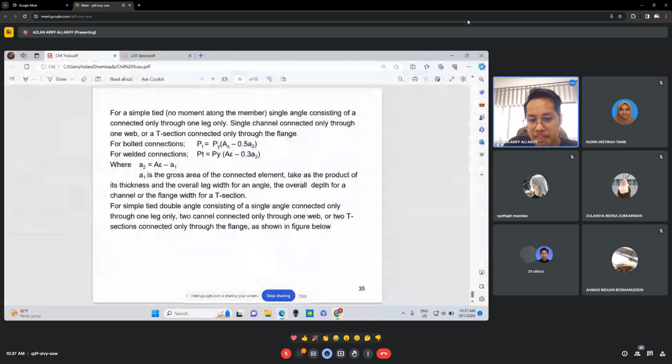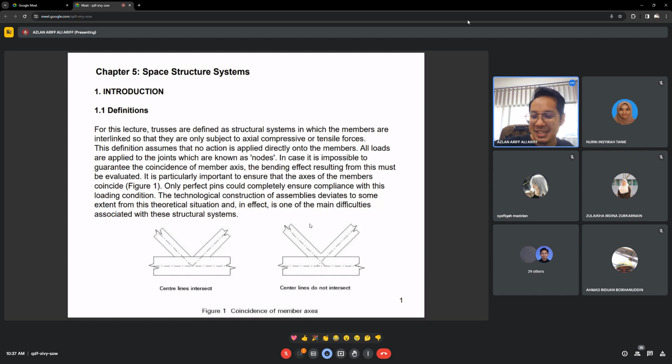Alright, okay, thank you. So continuing from earlier, we were discussing lattice, or truss, or lattice girder. Now we are going to space structure system. As I said earlier, space structure system is a continuation from truss. Truss is 2D, but space structure...

When we arrange many trusses, align them and interconnect them, it becomes a space structure, or in architecture we usually refer to them as space frame. Space frame is usually used for long span buildings. In your project, perhaps you guys have used this a bit during your Design 05 project if there's a long span area, especially multi-purpose halls or auditoriums.

But I usually see space frame used in your Design 08. InsyaAllah next semester you'll be in Design 08. So in some ways you will get familiarized with space structure, space frame structure if you opt to use this kind of aesthetic or long span spaces. But it depends, some Design 08 projects use timber, some use concrete. So it's up to your design or your intention in your design.

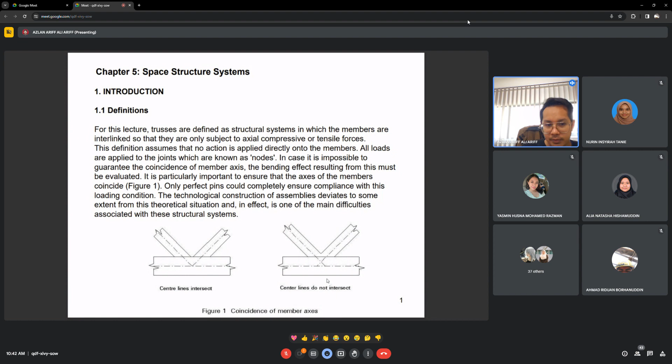So the technological construction of the assemblies deviates to some extent from this theoretical situation, and in fact is one of the main difficulties associated with this structural system. Only perfect pins can ensure compliance with the loading condition. We don't really know the loading condition in that case.

This lecture is concerned mainly with the truss system for roofs, which span in two directions - the term space structure. It's a bit hard for me to show since this is online, but perhaps some of the diagrams earlier can relate. Otherwise I can draw it. I need you to imagine it in some ways.

Alright, which span in two directions. For example, one direction is this one - this is what we see from 2D. But when we look from the left or right, they have another one. It will join at this point, but there will be another one like this. So when we have a development from truss which is planar 2D, and then another one aligns together, it creates a three-dimensional form. And within this three-dimensional space, it's where we call it space structure.

Other arrangements are possible, such as a continuous system based on the Vierendeel girder. Vierendeel is one of the founders who came up with this structure. Based on the Vierendeel girder, diagonal bracing members are unnecessary because bending behavior is predominant rather than axial behavior. The resultant voids can be used to accommodate mechanical and electrical services.

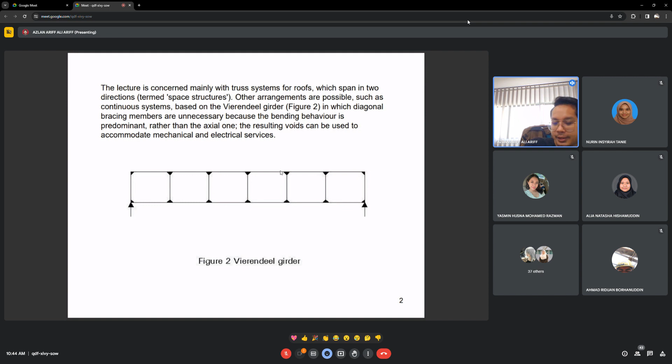Historical background: until the 1960s, almost all truss systems were two-dimensional. This one is very basic. They developed from timber roofs, which themselves had evolved from basic triangular arrangements to more complex shapes, as shown in Figure 3.

3A has led to the introduction of the suspended member, which is used to distribute the load. Again, when we talk about structure, we are talking about how we can distribute the structure effectively.

This one, when there's a connection between the ridge of the roof up here and the suspended member that ties back to the beam, it carries some of the loads that would otherwise be carried by the tie beam. It suspends back upward towards the ridge, and then it redistributes to the sides of the roof. That's how they achieve equilibrium of forces, or distribution of loads. That's B. Another one is a tie.

They have more members, so the loads can be more evenly distributed. On the last one, D, did that eliminate the tie beam? Another use of the tie beam is to carry the load while retaining the shape of the roof. But in this one, when they have some ties making up the suspender and the tie, the overall bottom chords of the beam can be eliminated.

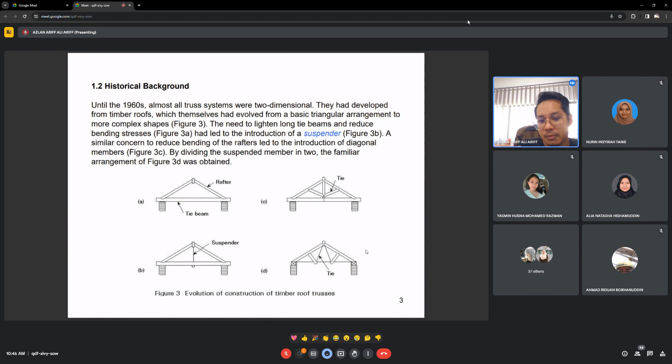The use of metal became dominant in the 19th century for all types of structures except domestic buildings. Metal was considered a high-tech or advanced building material in the 19th century. That's why the use of the material, the use of metal, was more limited to large span structures or bigger structures rather than domestic buildings like houses, residences, or offices, which rarely used metal.

This was for the infrastructure or mega structures that a country or government develops. Articulated systems commonly used for roofs of railway stations are perfect examples of the two-dimensional triangulated system. There are a lot of examples, and railway stations really exhibit some of the two-dimensional triangulated systems used for the space frame.

The second half of the 19th century was characterized by some remarkable achievements, for example the Garabit Viaduct in France, pictured in Figure 5, and the Maria Pia Bridge in Oporto. This one has no picture. Designed by Eiffel.

Eiffel, like with the Eiffel Tower he developed, used metal. The advancement of technology allowed for the use of metal, and the development of the space truss, because the entire construction of the Eiffel Tower, we can see, is also made from space frame or space truss.

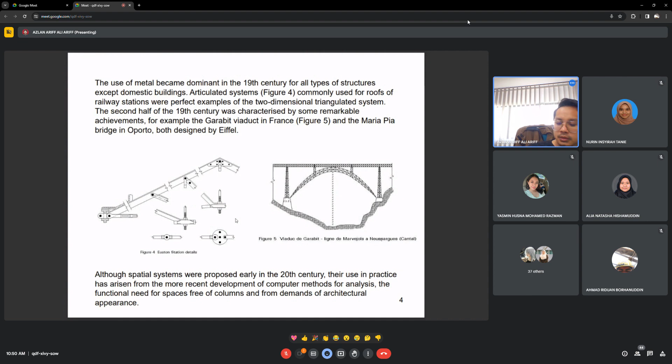Different types of system. Introduction: different types of the spatial truss system are normally classified according to their general shape. There are three shapes that are typically used in spatial truss systems, which are two-dimensional grids, cylindrical vaults, and domes. Later we will go through one by one.

In each case, it is advisable to distinguish between the single and double or even triple layer grids. The number of layers depends on the span. A third characteristic lies in the geometry chosen for the system of the members in the layers, and possibly in the composition of the bracing of the layers. For this space truss system, there is the single layer, the double layer, and it can go even triple layer grids. This is a form of grids.

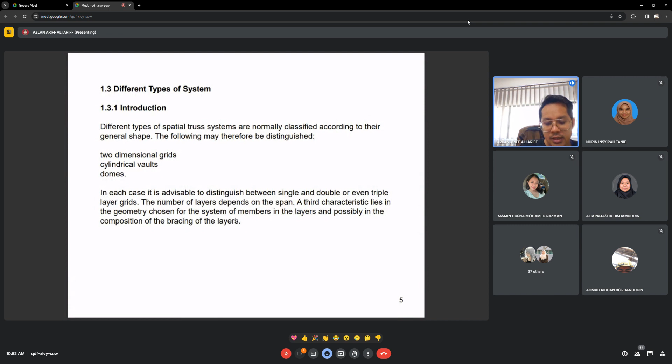Different shapes have different characteristics in terms of strength in the structure. Single layer grids: these grids are mentioned only as a reminder that this system is beam grillage, like a grill or net, which works in bending and torsion rather than axial loading from above. Bending and torsion come from the sides, from left and right.

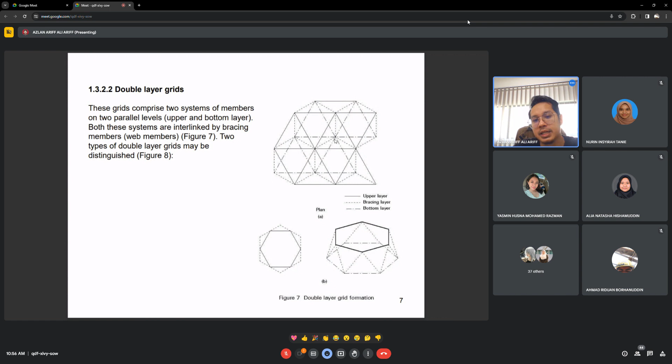Okay, you boleh nampak the classification. This is upper layer, the bracing layer yang the dotted one, and the bottom layer dekat bawah sekali. This is on the plan punya view. On 3-dimensional ataupun axonometric punya view, this one - you boleh nampak the top one, and then the bracing, and then it is joined to the bottom layer. This interconnected ataupun interlink is the bracing.

Lattice grids is where always the top and bottom chords are in the same vertical plane. Spatial grids made up of triangular base, pyramids, square or hexagonal. There are a few patterns, and different shapes carry different characteristics on the structural strength.

Okay, 2 kinds may be identified - one is where the layer geometrics are identical though displaced, offset grids, and the other layer geometric are different, okay, differential grids. These systems are suitable for spans up to 100 meters. For greater spans, it's necessary to incorporate triple layer, a triple layer grids, to avoid long members otherwise necessary with the increased depth.

Alright, so apa yang dia cakap member panjang-panjang ni is, each of the modules consists of the identical members ataupun the same modules, that are arranged together and connected together by the nodes. Okay, and ni rasanya I dah cakap sikit tadi, which is...

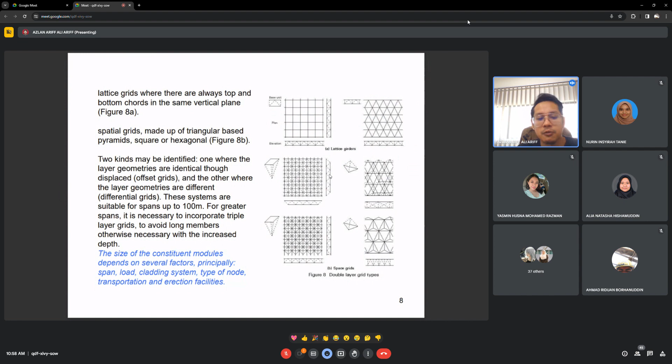The size of the constituent modules depends on several factors, principally the span, the load, cladding system, type of node, transportation, and erection facilities. For span between 30 to 40, length members about 1.5 to 3 are acceptable. So member length tadi macam satu lah, macam satu ni - 3 meter ataupun 1.5, between 1.5 to 3 meters dah cukup, considered acceptable.

Alright, the advantage of the double layer grids are numerous. There are three-dimensional structures which can withstand loads from any direction, because it is in three dimension, so it can resist the torsion, the bending, the axial loads, many kinds and many directions. They are hyperstatic, which is very stable, and buckling of some compression members does not cause the whole to collapse, as been demonstrated by mathematical models and experiment.

The stability ataupun the strength of the space frame structure double layer tadi is proven by the mathematical calculation and models, experiment. Their rigidity minimizes deflection. So of course, when you have space truss macam tadi, it can resist the forces from many directions, so that way it can minimize the deflection.

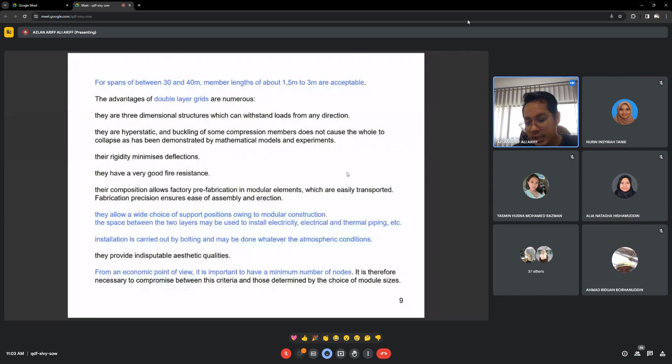Okay, no questions. So we move on now to the next one, which is cylindrical vaults. In the history of construction, cylindrical vaults appear as an evolution of arches.

Look, this is the arch. When we have cylindrical vaults, it's basically transforming the arches into 3D, which is the repeat. Like the space truss just now, it's planar 2D, when arranged with some alignments, it becomes 3D. Same for cylindrical vaults - from a simple arch, it repeats many times in one direction, it becomes cylindrical vaults.

The use of metal has enabled construction to be carried out with factory prefabricated elements which may be assembled on site. Again, the use of metal allows the construction members to be manufactured in the factory before it is transported and constructed and assembled at the site.

The first example to recall is the Crystal Palace, which was erected by Joseph Paxton for the Great Exhibition in 1851. This one I think you guys have already learned about in Western architecture, I believe. Crystal Palace.

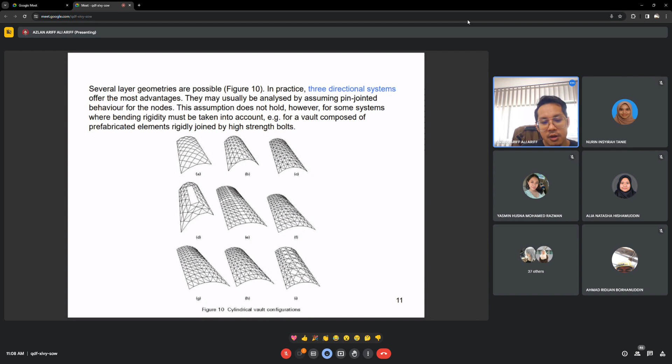Maybe this one eliminates the bracing so that it can allow some lighting. This one is the same, but it allows some numbers of bracing towards the center. It depends on what kind of building you are designing, how to allow some lighting towards the building. These are the determinant factors for choosing which kind of frame system for the cylindrical vaults.

The sensitivity of this system to asymmetrical action, in particular to wind, should not be underestimated. Such action can even bring about force reversal in the member, which is an additional reason for choosing three-directional geometry in which the length of the elements are identical.

Cylindrical vaults are also not spared from resistance towards wind. They still have some risk of being blown away due to the huge intensity of the wind load that causes reversal loads to the structure. So that's why some of the reinforcement, in this case three-directional geometry, helps to reinforce the structure so that it stabilizes and can resist the wind load or lateral load.

In the same way, choice of support condition along the boundaries influences the force distribution. So at the boundaries, you have the choice of the support condition, how the connection or the nodes are, and it also influences how the force is distributed.

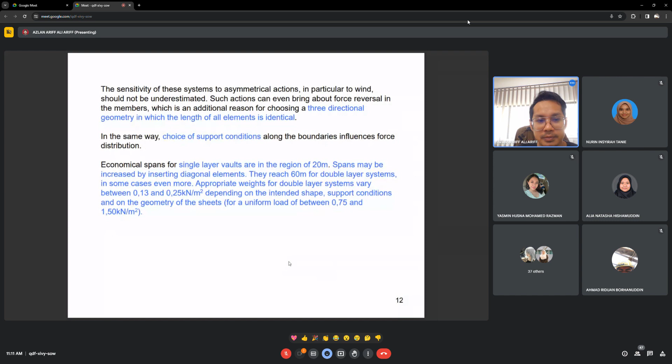Another one is domes. Earlier we went through single layer, and then single layer or double layer, then cylindrical vaults, and now domes. These are the examples of the space truss.

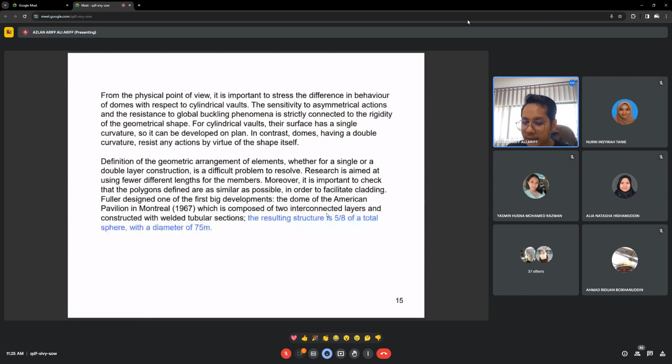Next, design of spatial truss systems. By conceptual design, it is important to define the geometry of the structure, as I mentioned a bit earlier, given that determining support position is an important factor in the strength and rigidity of the system. Geometric design parameters are the overall shape, flat shape or assembly of small flat shapes, so-called polyhedric surfaces, and curved surfaces, generally positive double curve surfaces.

One of the curvatures may be equal to zero, as in the example of cylindrical vaults. For curved surfaces, a rise-span ratio should be fixed to satisfy both mechanical and architectural criteria in order to avoid domes which are too shallow. Shallow domes can be quite risky.

I'll show you later. The geometry of the cladding supports is very important when considering the geometric design parameters—the layer of members, the number of layers, structural depth, and span ratio influence the weight, strength, and cost. Later I can show you a graph of the relationship between the span ratio and the weight, strength, and cost.

Frequency of the mesh refers to the number of geometric elements for a given length. Frequency of the mesh relates back to the geometry that you use—the smaller the geometry you have, the higher the frequency of the mesh will be.

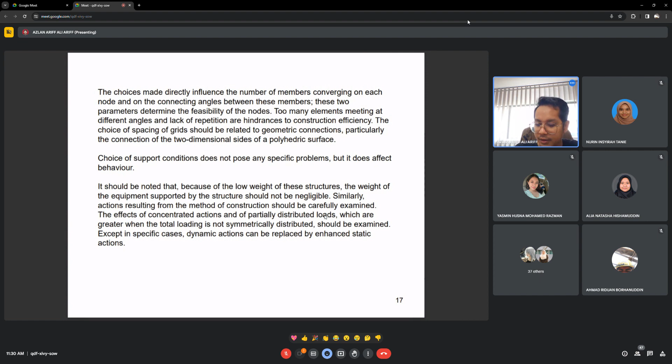In the design method, every project is undoubtedly an individual case. Different domes have different coverage, different spans, so every case of the design method is very unique. Nevertheless, it is possible to establish sequential steps in the development of the design. Most importantly, for a shape to be covered in many predetermined ways, two distinct methods can be used to define the general surface.

Either the overall space geometry is defined a priori, and then a geometric division must be made.

Sorry, wait a moment, I need to step away for a while.

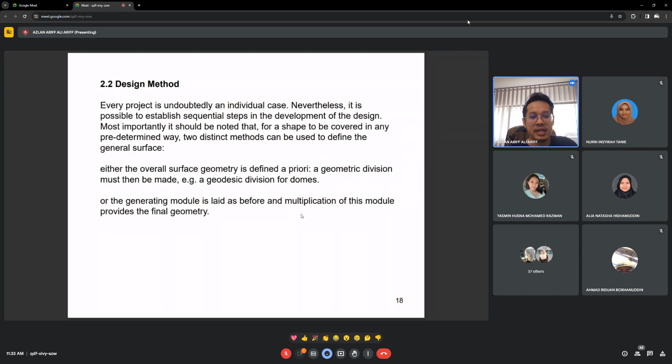Either the overall surface geometry is defined a priori and a geometric division must be made, such as a geodesic division for domes. A geodesic dome can be defined as a dome with a modularity of the same shape. For example, if it's a pentagon, the whole dome using the pentagon we call a geodesic dome. Or, the generating module is laid out first, and multiplication of this module provides the final geometry.

Once the overall geometry has been established, the designer must decide on the number of layers. Once you've established the geometry, whether you're using hexagonal or pentagon shapes, the designer must decide on the number of layers, whether single layer, double layer, or triple layer. This design depends basically on the free span, how much span or length is required for that design space, and also on the geometric distribution of the members in and between the layers.

The choice of the frequency of the mesh is very important for reasons of resistance and cost, as well as for aesthetic reasons. When you have a mesh in the frame structure, it provides stability to resist the forces. For cost, for example, you may want to eliminate some members in certain points, or use a reduced number of members—the choice of mesh frequency is determined by that, as well as for aesthetic reasons. Maybe you feel a denser mesh is more beautiful and intricate, or fewer members and less mesh can provide a more open atmosphere for the space.

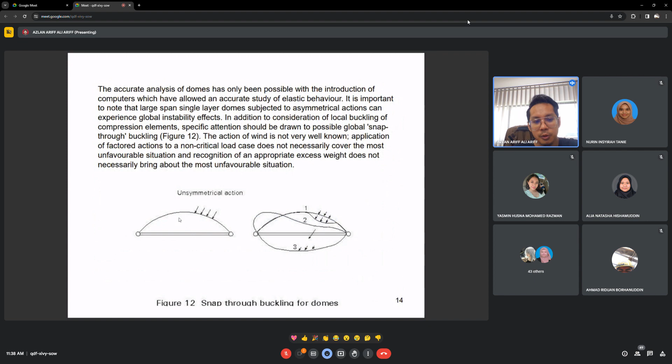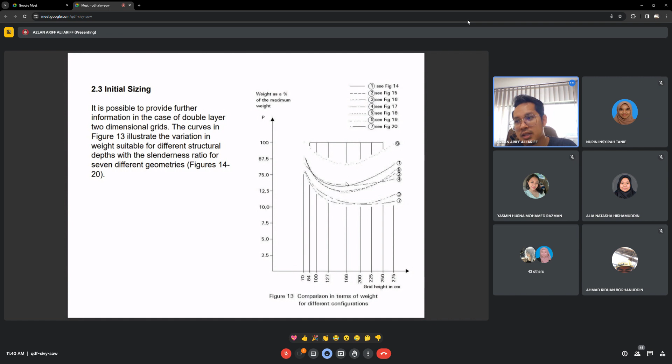But with 275, the dome is perhaps a bit more elongated upward. So its weight comes from the sides exerting through gravity, which adds to the weight of the dome itself. That's how the graph turns out like this. It has to be balanced for us to achieve the lightest structure that we can have for domes.

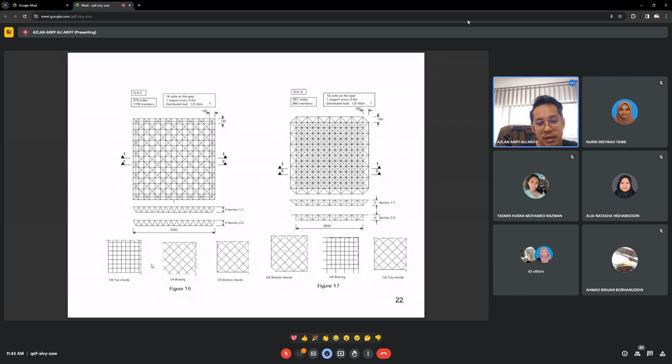But this one, you can see it uses different top chords, different bottom chords, so they have different bracing. It goes diagonal, following this pattern, so that it can support the top chords.

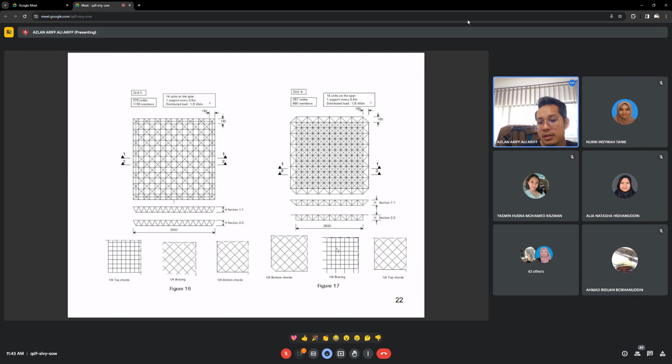This one, the bottom chords are like that, diagonally, top chords diagonally, but the bracing is like this, so it connects. Alright.

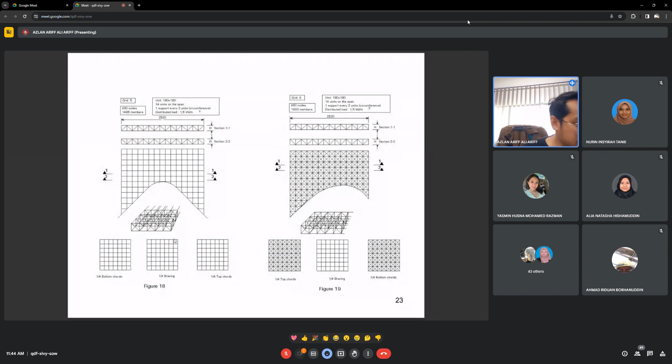So this one has these basic profiles, but what it's trying to show is more about how the connection between the two can still have different arrangements, different methods of bracing, while linking to the same or similar design of the bottom and top chords.

This one, the top chords and the bottom chords are the same, but the bracing is diagonal. So this is more stable than the other one because they have more members, especially reinforcing the overall structure by the diagonal.

This is some of the examples, I won't elaborate much on this.

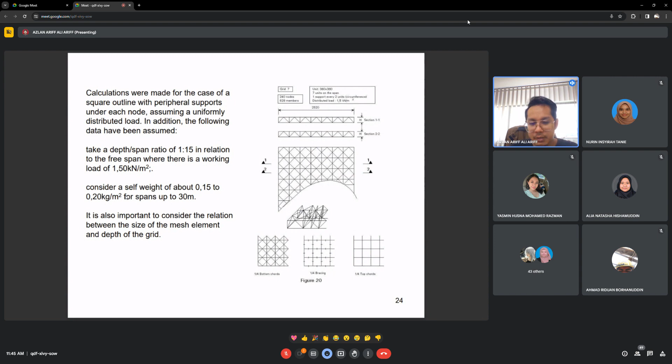Choice of the structural system. As soon as the overall shape of the structure is defined, it's necessary to choose the structural system. A wide variety of structural systems is available which can fulfill the geometrical requirements of the design. However, they cannot all provide the load carrying capacity required to resist the most unfavorable design loading conditions.

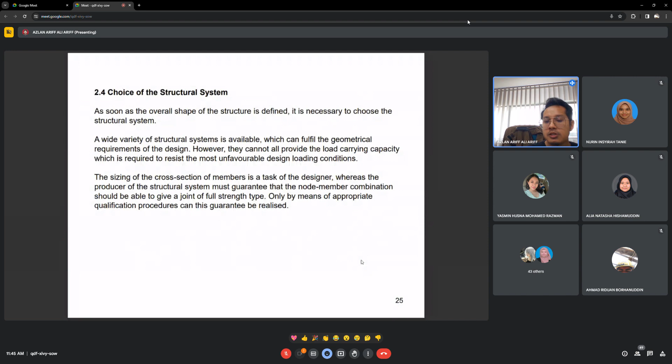The sizing of the cross section of the members is the task of the designer, whereas the producer of the structural system must guarantee that the node member combination should be able to give full joint of full strength type. Only by means of appropriate qualification procedures can this be guaranteed.

So this section, we would propose to the engineers or structural team, and then they will calculate how workable, the workability or the stability of this structure.

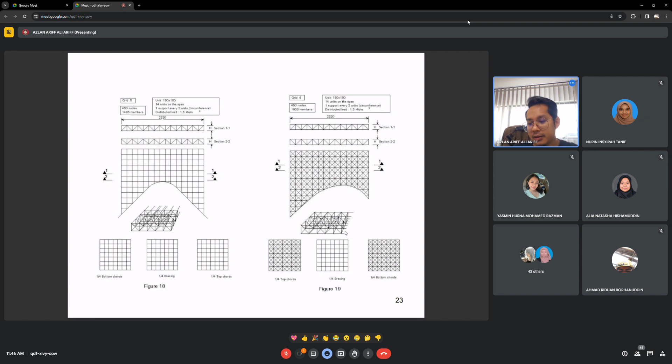Qualification procedure: the qualification procedure should demonstrate the system for the space structure based on the basic node member joint, which is a full strength type. The demonstration can be done by calculation and by test.

Some by calculation are more like prediction using software, computer. The test is the actual test being conducted on the structure itself, in real life, real time.

On the one hand, it is possible to model the node member joint by means of finite element techniques. However, it is not prudent to rely solely on this numerical result, which is more like an estimation. On the other hand, only experimental evidence can fully demonstrate the actual behavior of the system.

Sometimes when we simulate or provide estimation based on the structure, for example we run a simulation on the computer, the computer says structurally this is fine, there are a few points that are very critical that need to be reinforced. But then, when doing the actual test, it turns out the critical point is somewhere else.

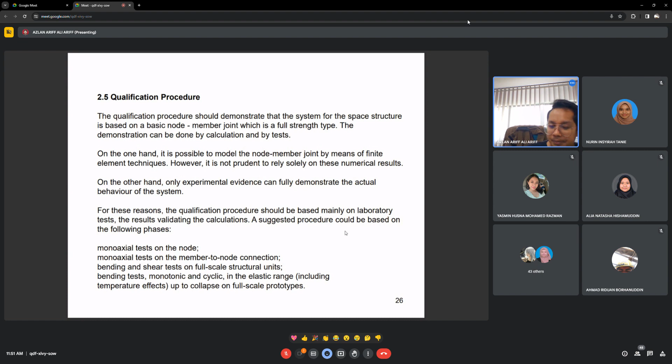Analysis of space truss system. Different analysis methods - there are a few methods. The objective of the analysis of truss system is to determine the values of the variables necessary for sizing purposes and for sizing their supports.

The variables generally required may be compressive and tensile forces in the members of the system, node displacement, and values of the support reaction. The study has to be made for several cases of actions and combinations of actions. The most unfavorable cases are used as the basis for the design.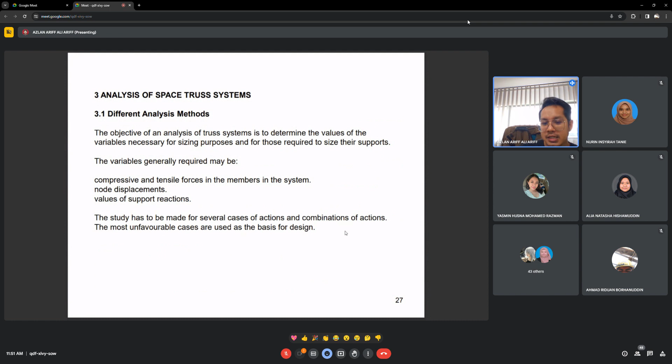Method of joints. Depending on the type being examined, it's not necessarily possible to determine all unknown quantities. Sometimes those unknown quantities cannot be determined. So it is still okay, but we need to ensure some of the important forces, different quantities, are determined so that we can conduct the method of analysis.

Determine the forces in all members. They can be determined by analytical or graphical methods. This is the two-dimensional scheme and the method of jointing - you can look at how the direction of the forces goes.

Because when we develop this kind of graphical graph, we need to understand the equilibrium of each of the members and the force that is exerted on it - the direction from where the resultant force is coming, the direction of the axial force, and so on.

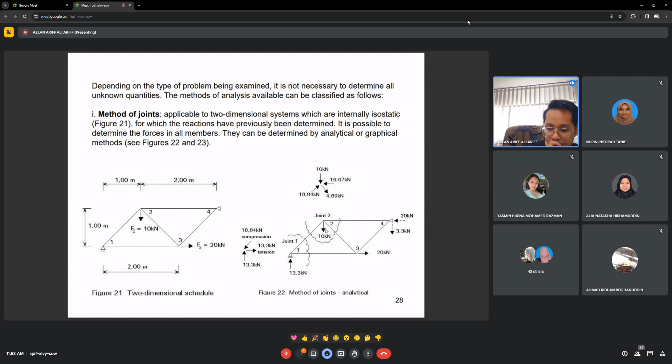So another point, when we draft our method of joints graphically, as we arrange them together, there are a few forces that are taken into consideration. You have equilibrium of node 1, node 2, and then node 3 and 4. So all four of these equilibriums must be illustrated in a unified diagram or visual, so that for each of these interconnected members, we can identify the counter force of each of the forces.

So this is where the overall graphical forces are in balance or in equilibrium.

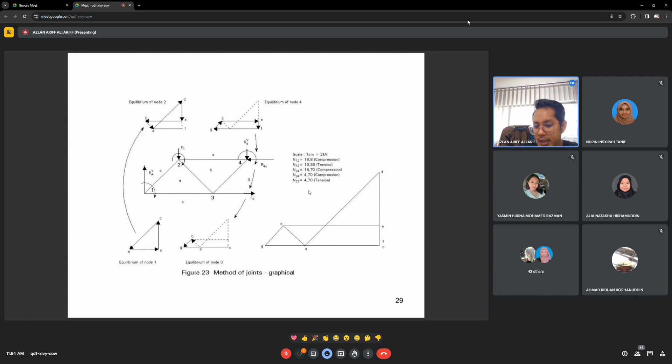Method of section. In certain cases, this method can give direct access to internal forces in a limited number of members selected by the designer. It is used, for example, for preliminary design work in order to assess the maximum forces in a triangulated system.

So method of section, we have repeated modularity in between the structures. So we can identify the certain critical points, like the points upwards, and then how the resistance on the structure and the loading that is imposed on the structure.

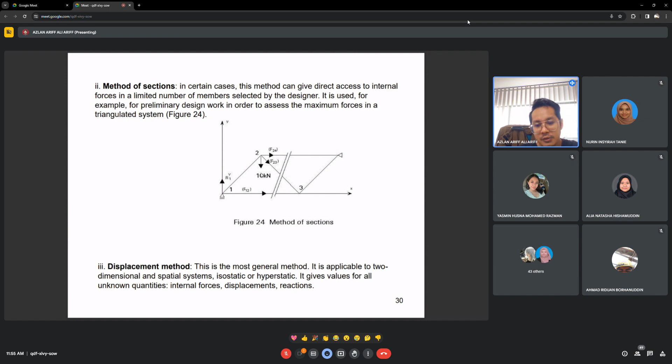Displacement method. This is the most general method. It is applicable to two-dimensional and spatial systems, isostatic or hyperstatic. It gives values for all unknown quantities: internal forces, displacements, and reactions.

Design assumption. In addition to use of the principles which are common to all structures in respect of actions and their combination, Eurocode allows a perfectly pin jointed model for global analysis. This is an assumption, because otherwise if there is a fixed situation, it involves a whole different way to calculate. So the most easy and most optimum way is by assuming that the structures are all perfectly pin jointed.

Furthermore, it is considered that all actions are applied at the system nodes. It is sufficient to assume linear elastic response.

Calculation in the elastoplastic range can be done by using simplified models of the members, shown in figure 25. The results show that a reasonably stable response of compression elements after the ultimate load of a member is reached can be achieved, and the forces are transferred to the adjacent members from that which has reached its ultimate resistance.

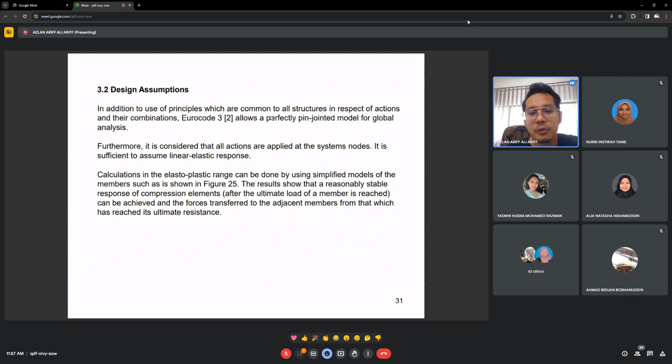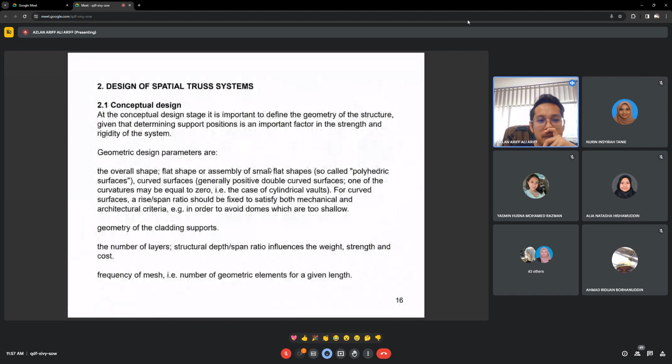Okay, that's all for our class today, our last class today. Any questions on this? Design assumption, method of jointing, analysis, choice. But the theoretical part is more towards the ones in front here - how the design parameters, the types of space truss, whether dome, cylindrical vaults, or single layer, double layer.

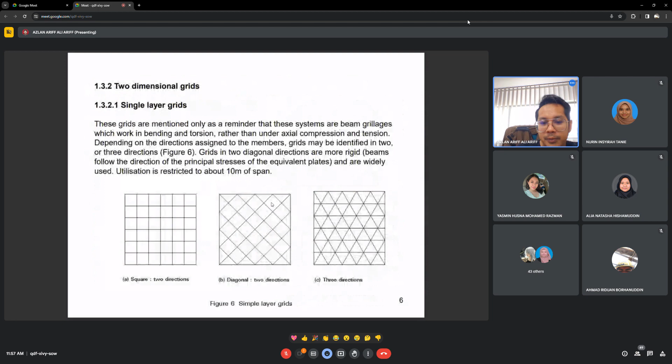Any questions? None. Okay. This is Afira. Thank you, in the chat.